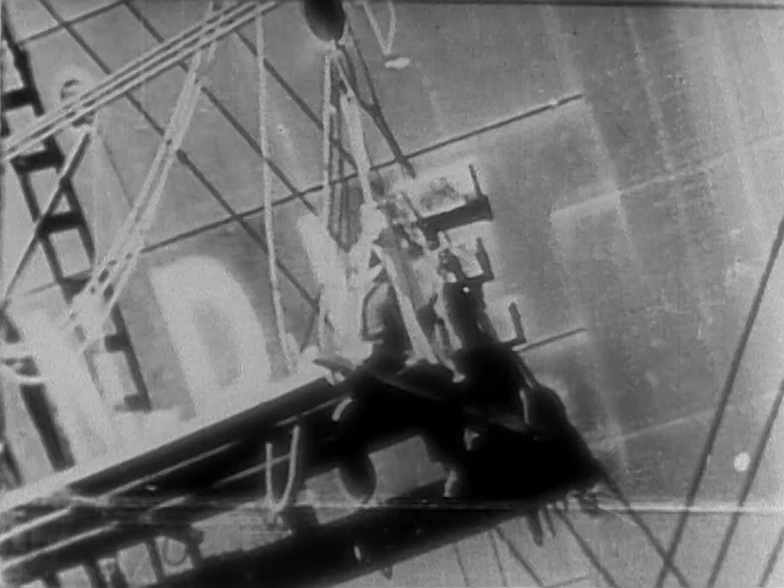On the 9th of February 1942, as the work of conversion neared completion, sparks from a burner's torch ignited bales of life preservers in the Grand Lounge and a fire started. Fanned by a strong northwest wind, the blaze swept over both sides of the promenade deck until by 15:30 it appeared that the entire deck was aflame.

Shortly thereafter, the fire caught hold on the quarters of the boat deck, sun deck, and on the bridge, so that the 3 upper decks and practically all spaces except the theater were enveloped in flames and smoke.

The New York City Fire Department took charge of the firefighting activities. Operations were directed chiefly toward getting the fire under control as soon as possible, keeping it from spreading to the lower decks, and protecting the pier on the leeward side of the vessel.

By 15:30, the Lafayette had taken a list to port. Gradually, this list increased, until by 2:45 on the 10th of February, the vessel completely capsized, coming to rest on the port side at an angle of a little less than 80 degrees.

The capsizing was the result of a combination of circumstances. First, the reduction of the ship's metacentric height, or stability, to a negative value, causing the ship to heel over. This took place soon after the streams of water had collected on the upper decks. Secondly, the ship's effective freeboard was reduced because of open air and cargo ports on E deck. As the vessel listed past 13 degrees, these ports were submerged.

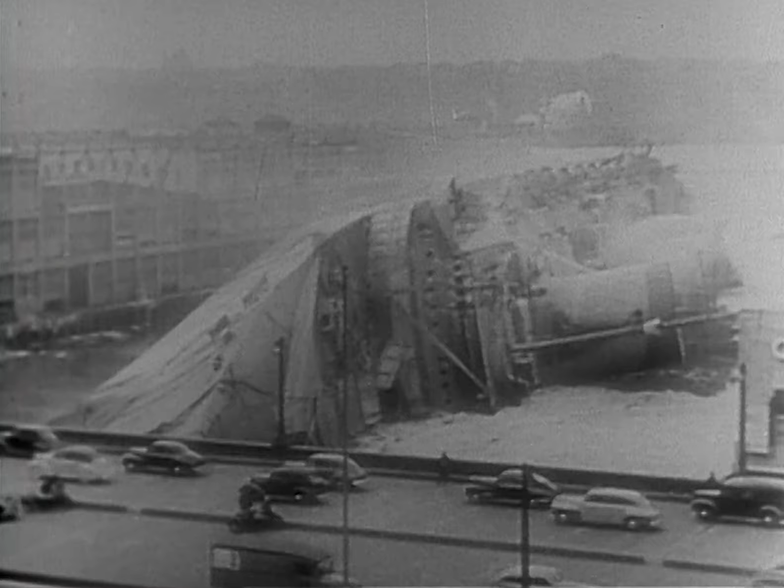The Secretary of the Navy appointed a special committee to make recommendations with respect to salvage or other disposition of the USS Lafayette. The recommendation of the committee was that the vessel should be raised.

The Bureau of Ships placed the vessel under the cognizance of the Supervisor of Salvage, Commodore W.A. Sullivan, who in turn was succeeded by Captain B.E. Manseau. They had at their command the facilities of the Navy Salvage Service, which consists of the salvage section of the Merritt, Chapman and Scott Corporation, operating under the General Ship Salvage Contract, NOBS 36.

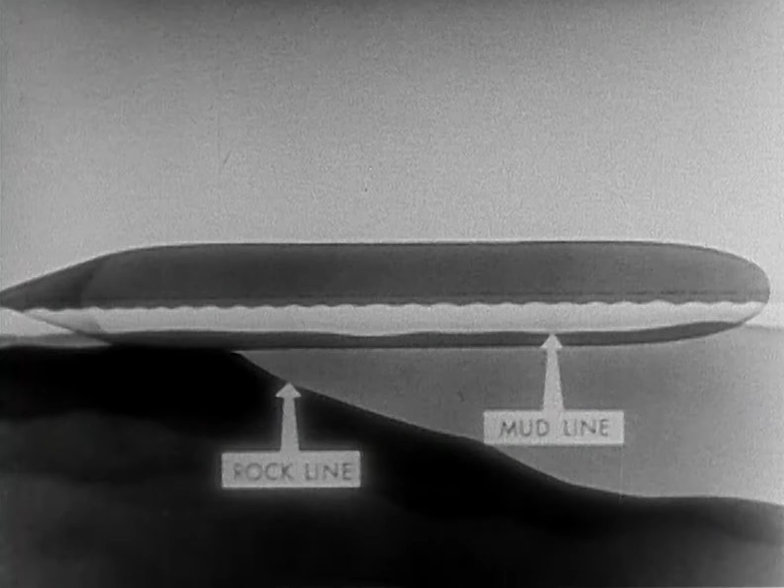At a point about 1/3 the length of the vessel from the bow, the rock profile of Manhattan sloped steeply off into the riverbed. A considerable portion of the vessel's weight rested on this rock shelf. The after 2/3 of the length of the ship was supported and surrounded by mud and soil of various densities. Actually, the possibility of salvage by pumping depended upon the soil in which the after portion of the ship rested, ultimately developing enough bearing to resist the initial tendency to settle by the stern.

It was the decision of the engineers that the ship should be raised by controlled pumping. To supervise the work, engineering offices were erected on a barge alongside the Lafayette, and details were worked out in the main offices of the Merritt, Chapman and Scott Corporation. Upon Mr. A.C.W. Siecke, naval architect and consultant engineer, Merritt, Chapman and Scott Corporation, rested the entire program of stability and strength calculations.

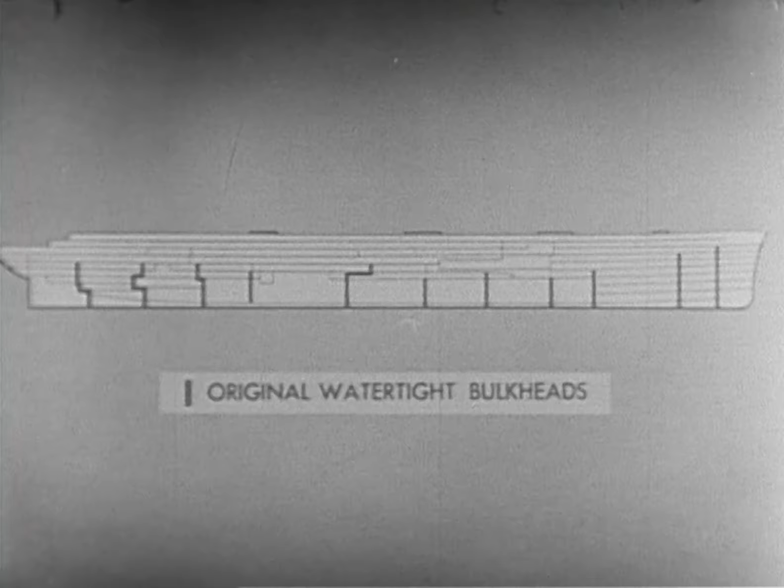The preliminary step in the salvage operation was the removal of the superstructure above the promenade deck. Controlled pumping involved the division of the ship into numerous watertight compartments. The compartmentation of the ship was based upon the original watertight bulkheads. Wooden watertight bulkheads were constructed between decks where no original watertight bulkheads existed.

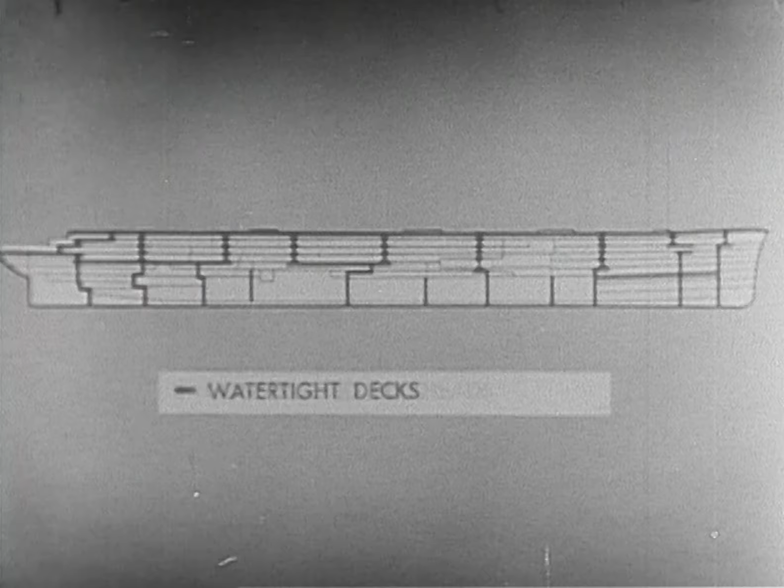To complete the compartmentation, the promenade deck and certain decks below were made watertight. This compartmentation was necessary to control the relationship between the center of gravity and the center of buoyancy during righting operations, and also to control any unforeseen leaks or failures.

At the beginning, there was only a limited number of experienced divers available. Consequently, 2 diving schools were organized at Pier 88, 1 civilian and 1 for Navy divers. As the student divers gained proficiency in handling underwater tools and the diving dress, they were sent out to do underwater work on the Lafayette. Eventually, as many as 73 civilian divers were employed at one time, besides a considerable number of Navy divers.

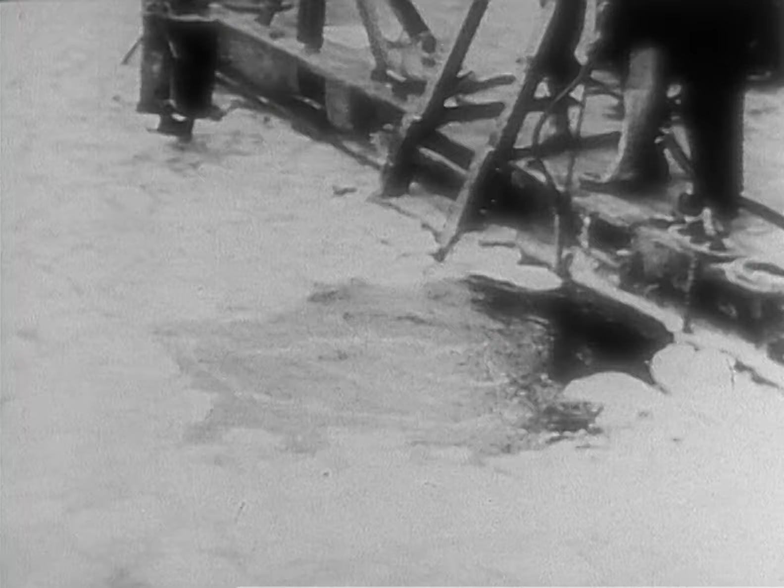Diving conditions were extremely hazardous. Jagged steel edges and broken glass were an ever-present threat. The maze of debris-packed passageways presented a terrific problem. The men worked in complete darkness, the water in the slip containing such an amount of mud and sewage that underwater lights were useless. Work was accomplished by sense of touch alone.

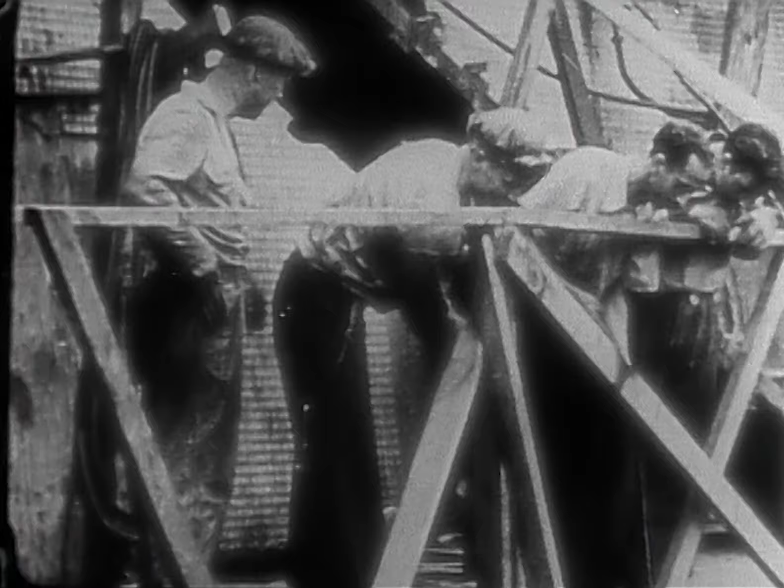Approximately 5,000 tons of superstructure was removed, slightly less than half of which was submerged and was cut away by divers using the underwater gas torch. These decks were removed to lower the center of gravity and to make accessible the various uptake openings for patching.

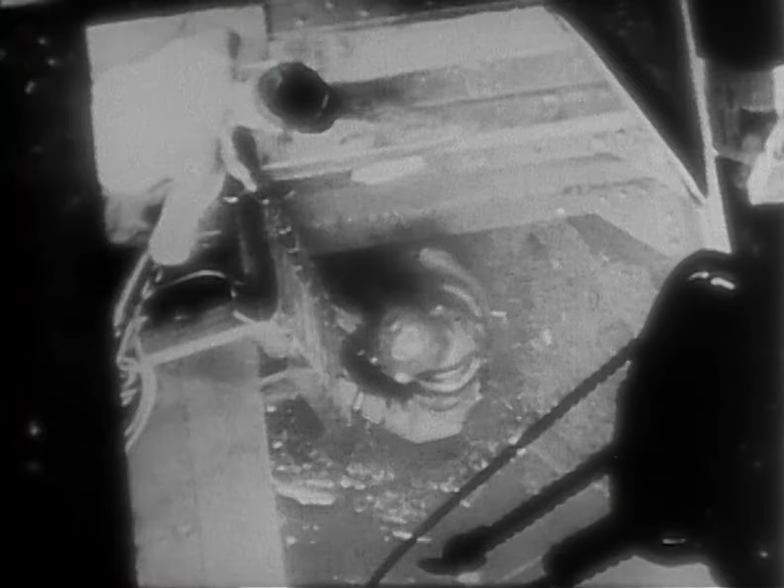When the Lafayette capsized, furniture, stores, and other loose objects accumulated on the port side, blocking passageways, making it necessary for divers to clear away this debris before commencing the actual salvage construction. All minor cabin bulkheading and ship's piping was removed to lighten the ship as much as possible and to make room for the watertight bulkheads. These operations often were carried on in 50 feet of water and 10 feet of mud, since much of this debris had settled to the lowest possible point, the submerged port side of the ship.

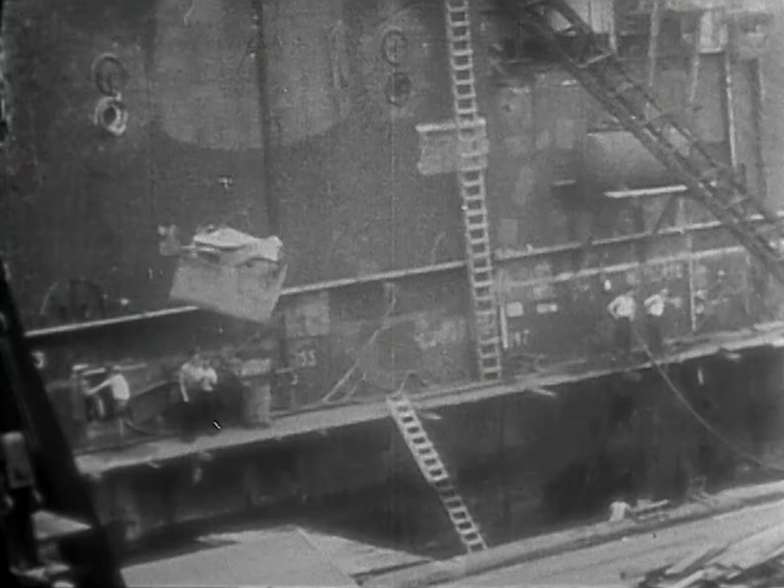After capsizing, cargo passages became vertical shafts, and through these shafts, scrap material was hoisted from the interior of the ship and deposited on barges lying alongside. Records were kept of the weight removed for future calculation.

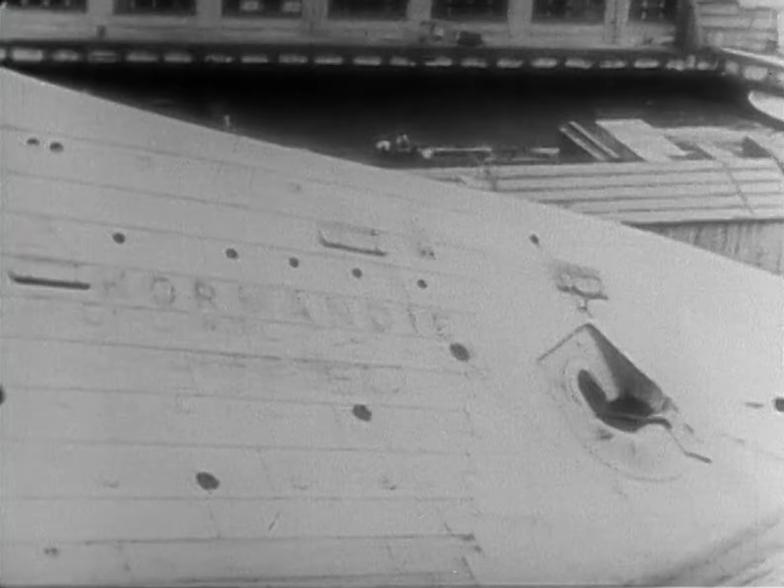A miniature industrial city sprang up on the starboard side of the Lafayette. Air compressors for the diving units, portable power generators, tool sheds, banks of cylinders containing cutting gas, firefighting equipment, winches, small derricks, catwalks, welding machines. Power and water lines ran the length of the hull.

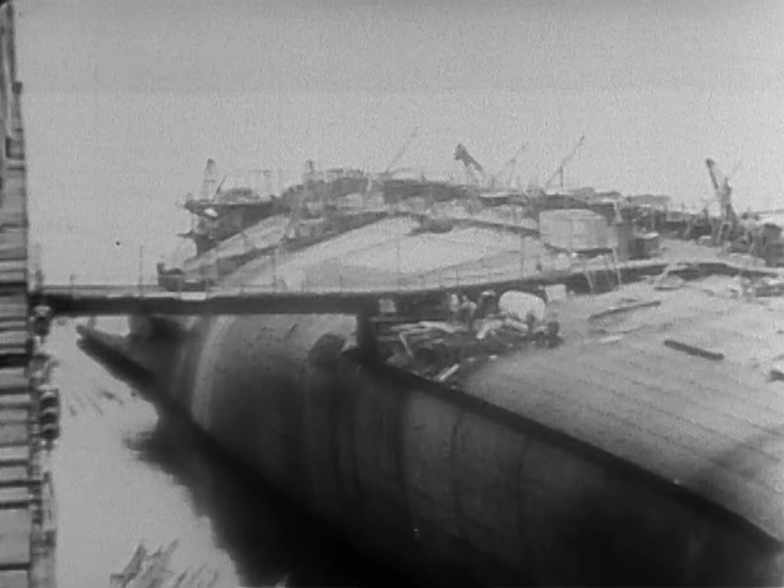Barges were moored along the almost vertical face of the promenade deck. These contained the blacksmith shop, the carpenter shop, machine shop, and engineering office, while other barges used as lighters passed to and from the ship carrying material and scrap. During salvage operations, the Lafayette presented a strange appearance to those aboard ships passing up and down the busy Hudson River, much like a giant Gulliver overrun with busy Lilliputians.

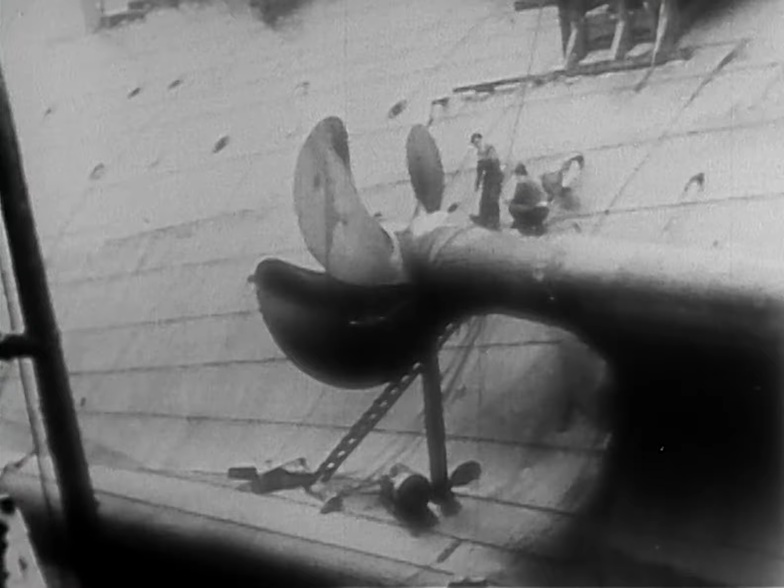To prevent any possible damage to the starboard screws, they were removed prior to righting operations. Each of the screws weighed 23 tons. The port screws, being submerged in 50 feet of mud and water, could not be removed.

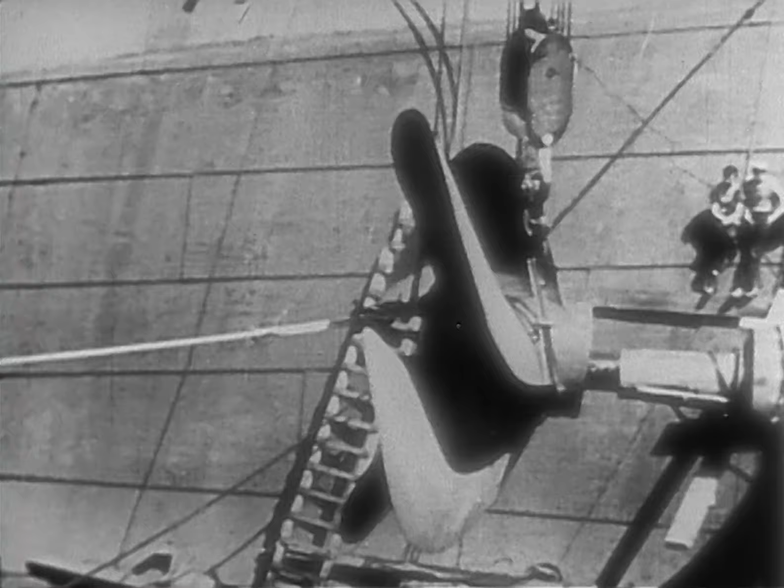The interior of the ship as she lay on her side presented another strange spectacle. Bulkheads became decks, decks became bulkheads. Elevator shafts were used as companionways, and the former thwartships passageways were used as elevator shafts. Stairways and ship's ladders were useless, and carpenters were kept busy during the entire salvage operation building wooden ladders, platforms, and scaffolding to facilitate movement of men and materials throughout the interior of the ship. Miles of ladders and thousands of feet of lumber were used in this construction.

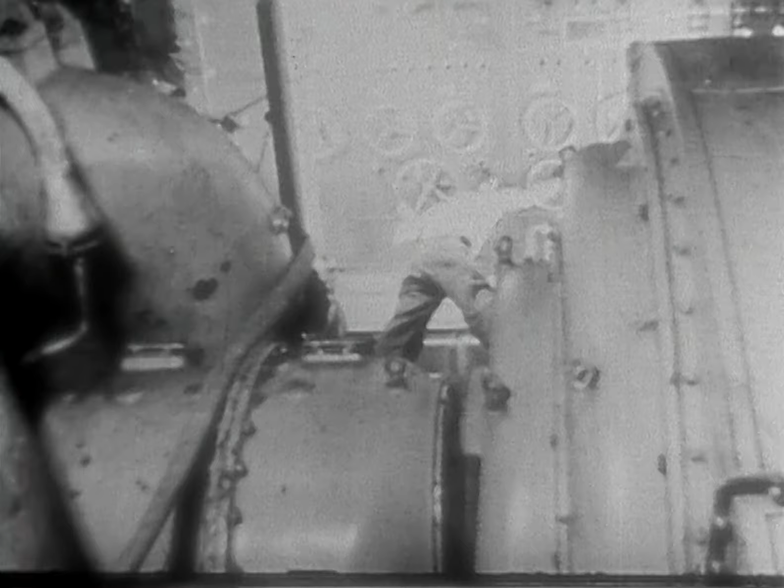Immersion destroyed the ship's electric system. 3 of the 4 turbines were inundated, but after the ship was raised, the blading of the turbines was found to be only slightly corroded.

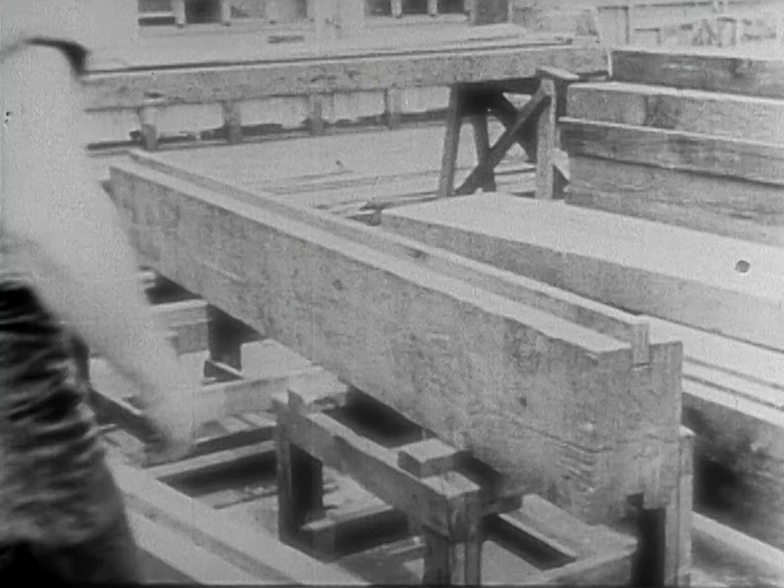To compartment the ship, it was necessary to install large wooden bulkheads. The bulkheads were constructed of grooved 8 by 12 timbers with a 2 by 4 joint. Approximately 210,000 board feet of 8 by 12 timbers and form lumber was used in constructing these bulkheads. If all bulkheads were placed together, they would make a bulkhead 350 feet long and 60 feet deep. The placement of bulkheads in the Lafayette followed this plan.

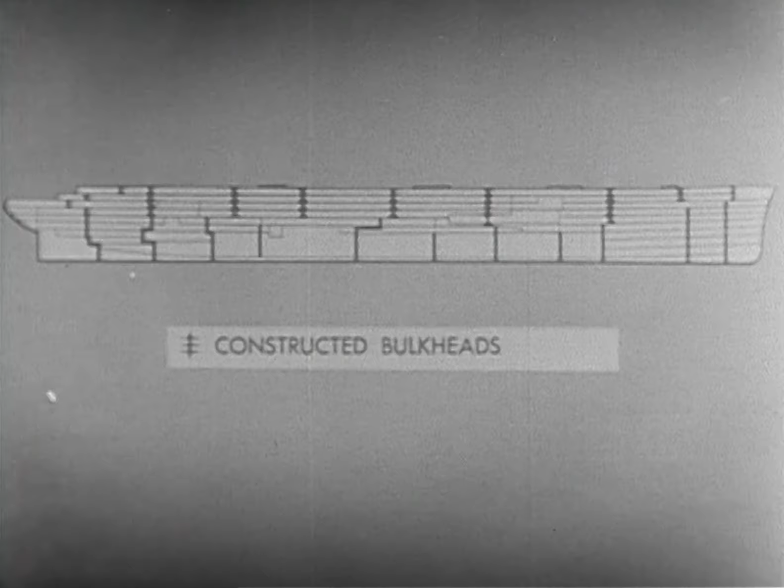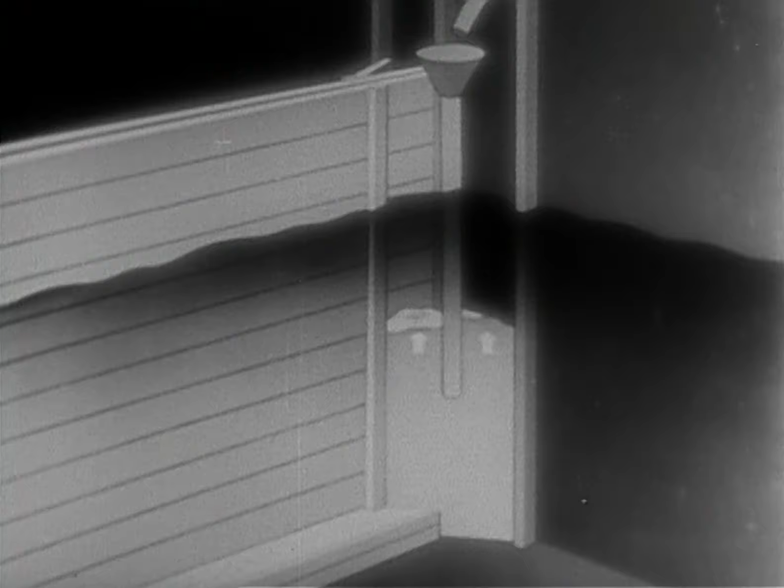For water tightness, concrete was poured where the wooden bulkheads met the ship's steel decks and where they met the skin of the ship. The concrete was poured underwater using the Tremie process. The concrete was pumped into forms by a Pumpcrete machine, sealing the wooden bulkheads to the steel structure of the ship. These bulkheads were built from above water downward, and 900 cubic yards of a 1-2-3 mix of concrete was used for the sealing.

To back up cargo ports and airport patches on the port side of the vessel, divers poured bags of concrete over these spots to strengthen them. 16 cargo ports and 356 airports were strengthened in this manner.

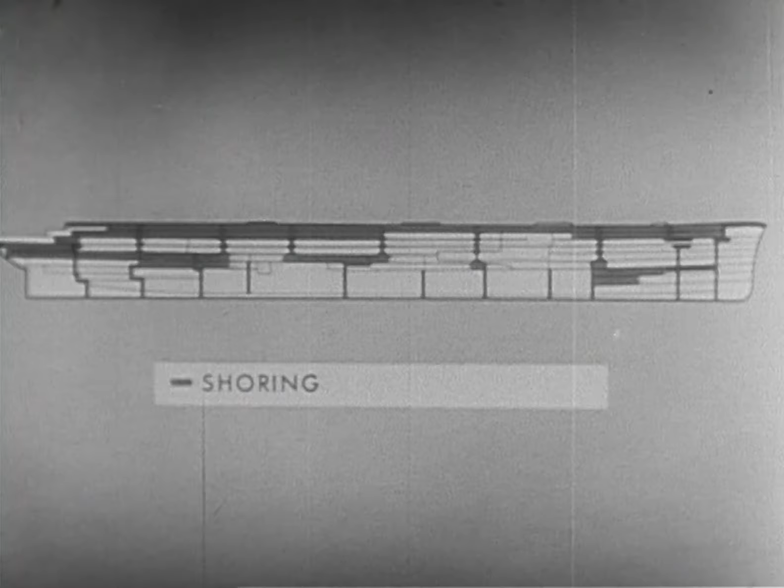The amount of shoring which had to be done is indicated here. In all salvage jobs requiring extensive pumping, the ability of decks and bulkheads to withstand the hydrostatic heads expected requires thorough consideration. Timber beams were placed between the original deck beams to support the deck plating against water pressure. The shoring extended from these timber beams to timber stringers on the deck below.

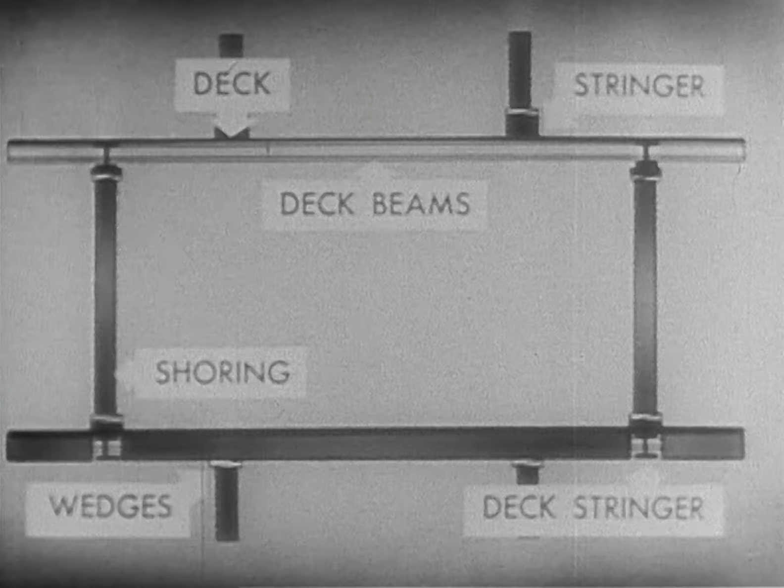This is the shoring at C deck after the ship was raised to 30 degrees. A total of 90,000 board feet, or approximately 1.5 miles of shoring timbers, were used, and all the immense amount of material was placed and aligned by divers. Here are indicated the underwater openings on the promenade deck, which necessitated the construction of special patches.

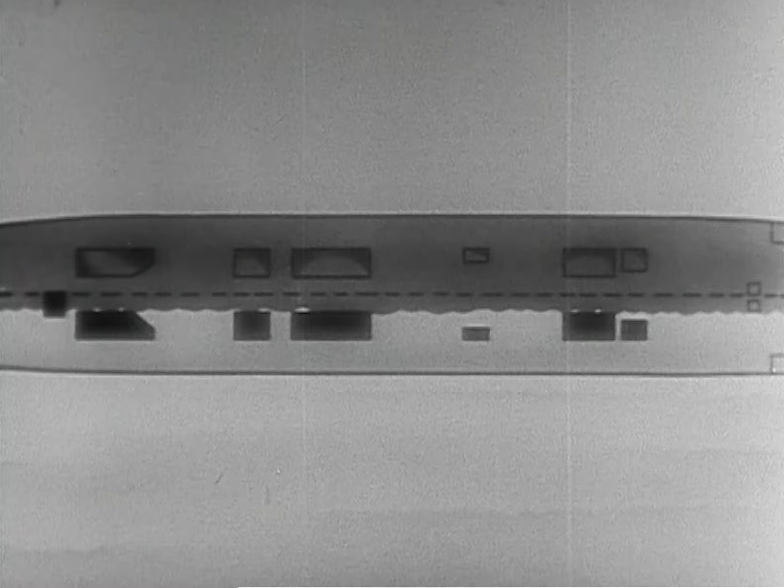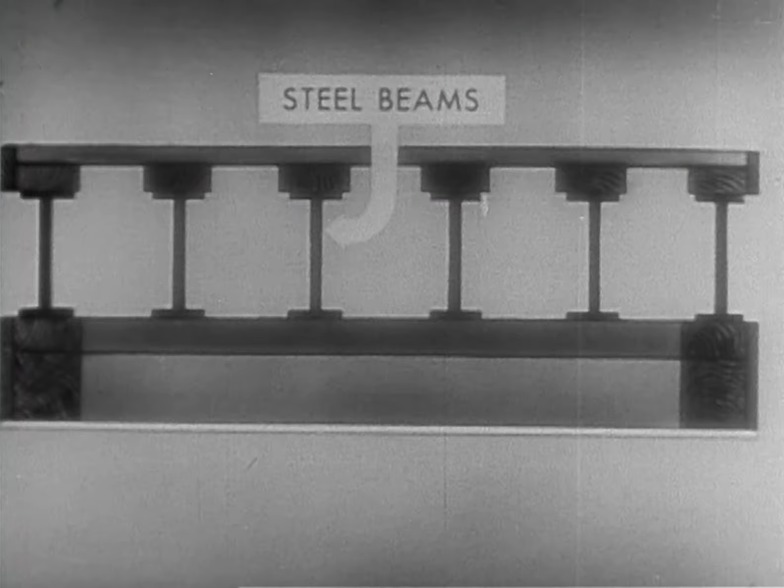The main patches were constructed in this manner. It is interesting to note that 21-inch steel I-beams were used. Also, that rubber gaskets used in patches were made from rubber recovered from the Lafayette's decking.

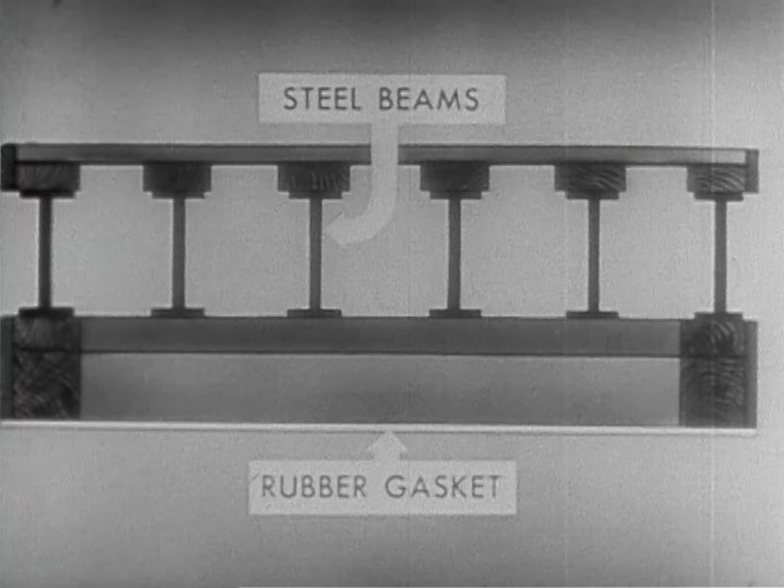The patches for the various openings were constructed on the barges moored alongside, and when completed, were placed in position through a combined operation of men on the surface, divers, and derricks. Here, a turbine uptake patch weighing 21 tons is being lowered into the water preliminary to transferring it to a vertical position for placement against the ship.

All large patches were equipped with gate valves through which water was permitted to flow to keep the water levels inside and outside equalized until ready to commence pumping. The valves also permitted flooding during pumping operations should that become necessary.

When the patches were properly seated, the rods or bolts which had been previously secured at the inboard end to a suitable ship structure by means of hinge shackles or levers, were run through corresponding bolt holes in the patches and bolted up by divers from the outside.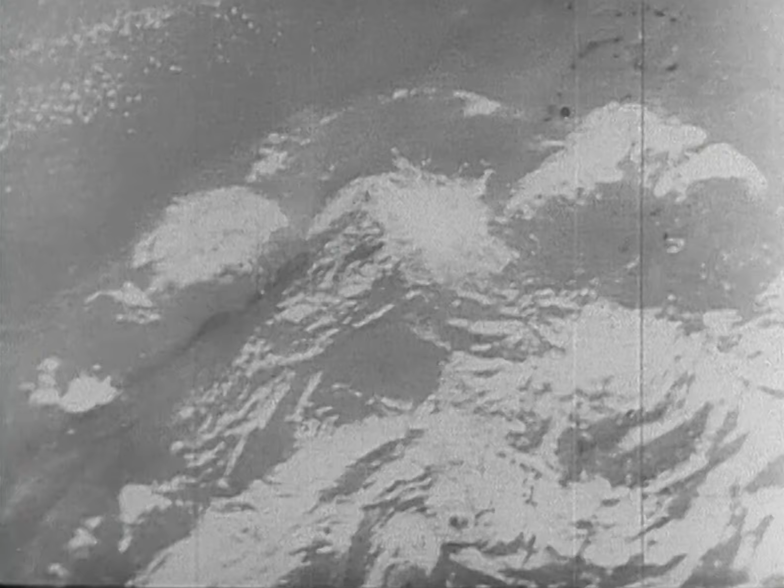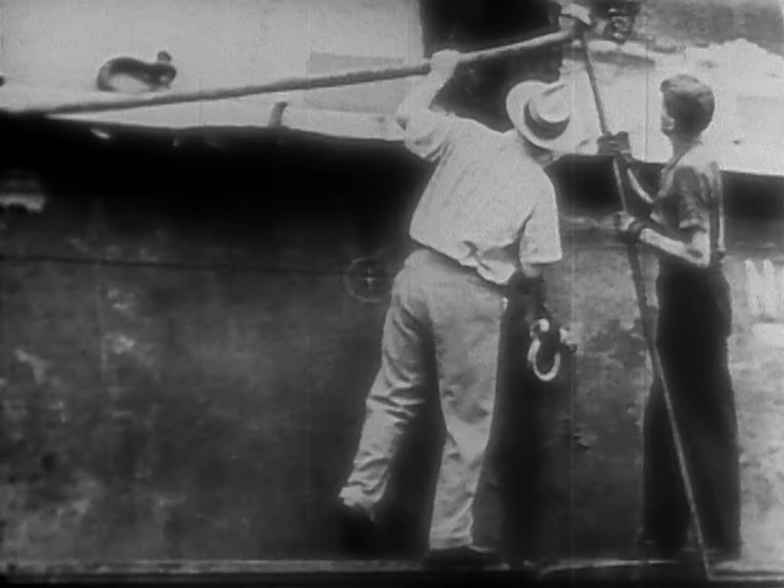Captain J.I. Tooker, one of Merritt, Chapman, and Scott's leading salvage officers, was made superintendent of the work on the Lafayette. Captain Tooker was well suited for the Lafayette job in view of his previous experience in salvaging capsized vessels, and particularly in view of his many years' experience in diving.

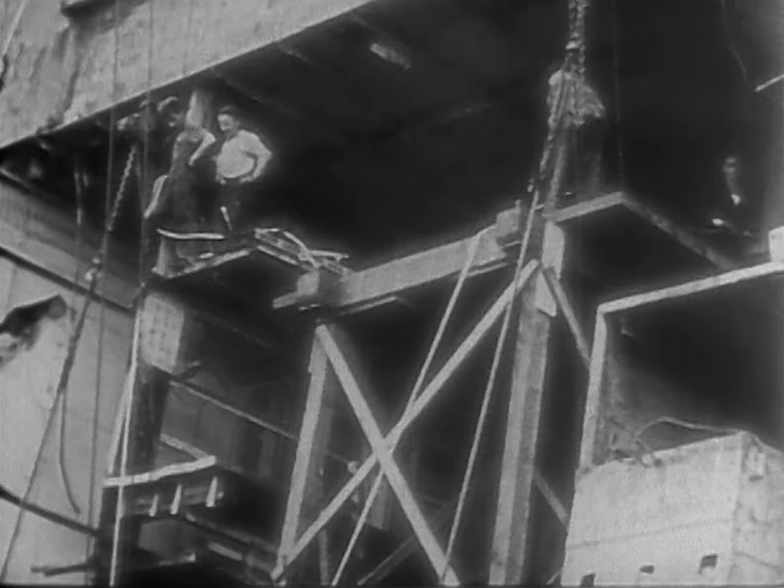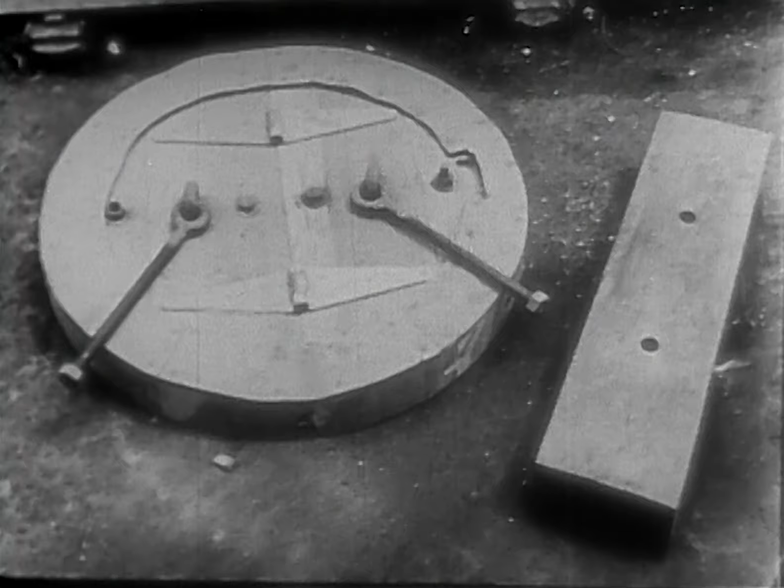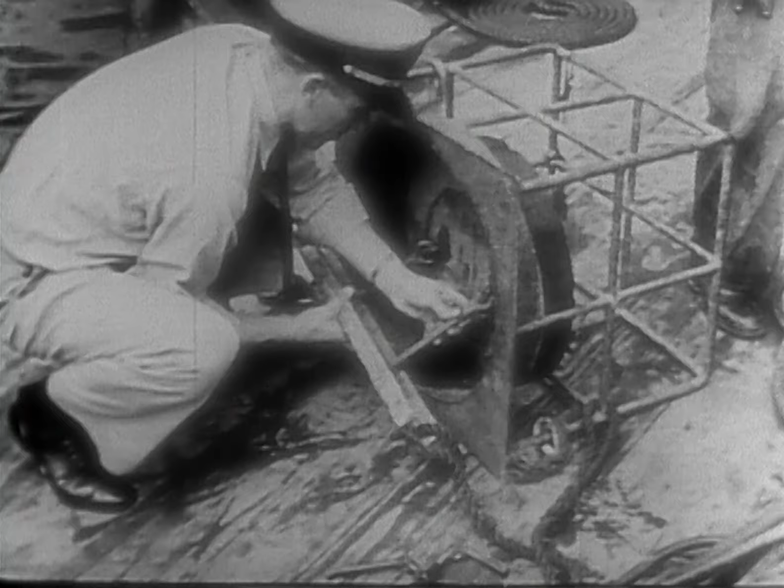Porthole patches were hinged discs of wood with strong backs. The patches were hinged to enable the diver to place the patch through the porthole from the inside of the ship. It was often necessary to excavate 10 feet of mud to place these patches, and sometimes it required a week's work for the placement of one patch. 356 patches were placed in this manner, one diver working the entire period of salvage operation on this job alone.

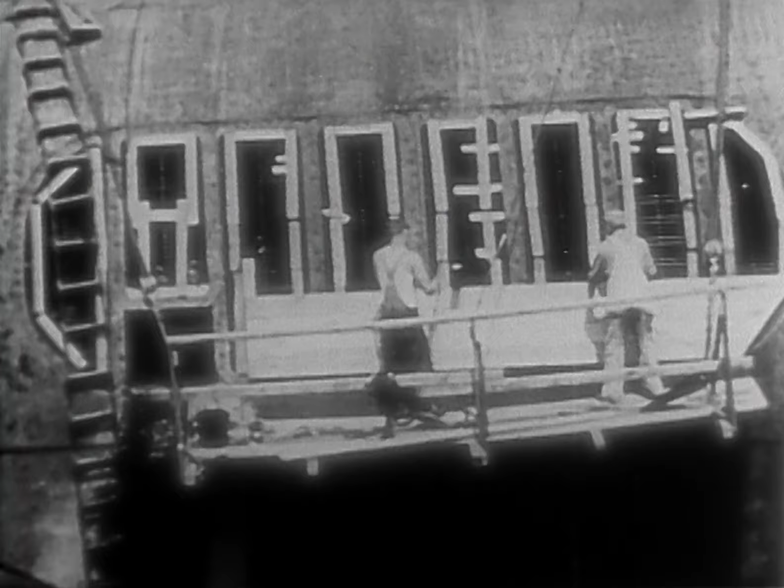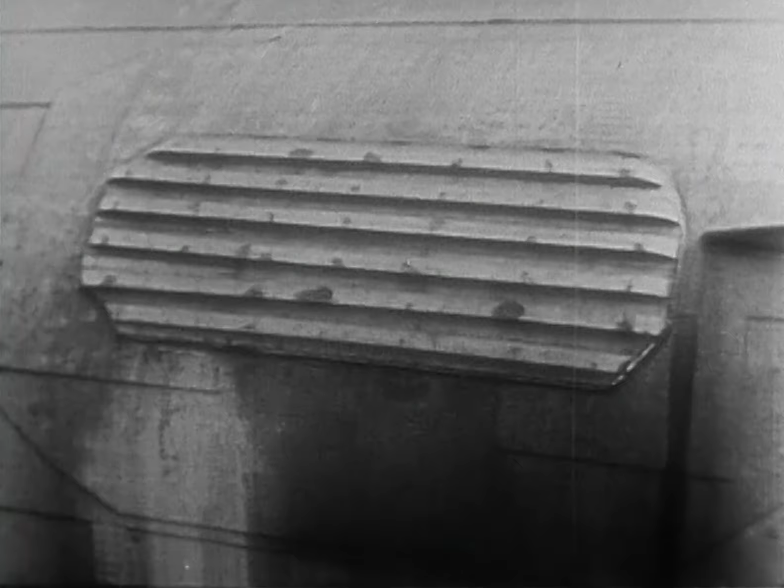As a safety precaution, the starboard condenser intake was covered with a wooden patch to ensure water tightness when the ship was righted. Wooden plugs were used to seal 4,500 small openings. All patches, plugs, shoring, and bulkhead timbers were prefabricated in the carpenter and blacksmith shops located aboard the barges moored alongside the face of the promenade deck.

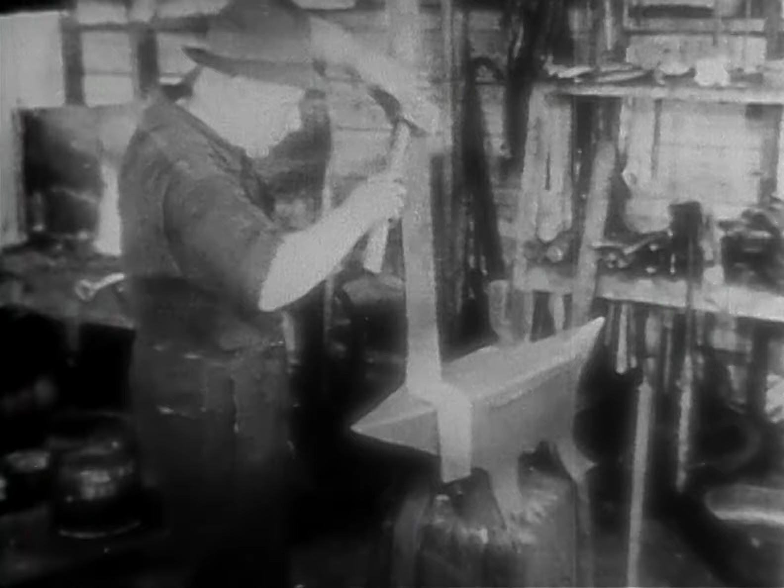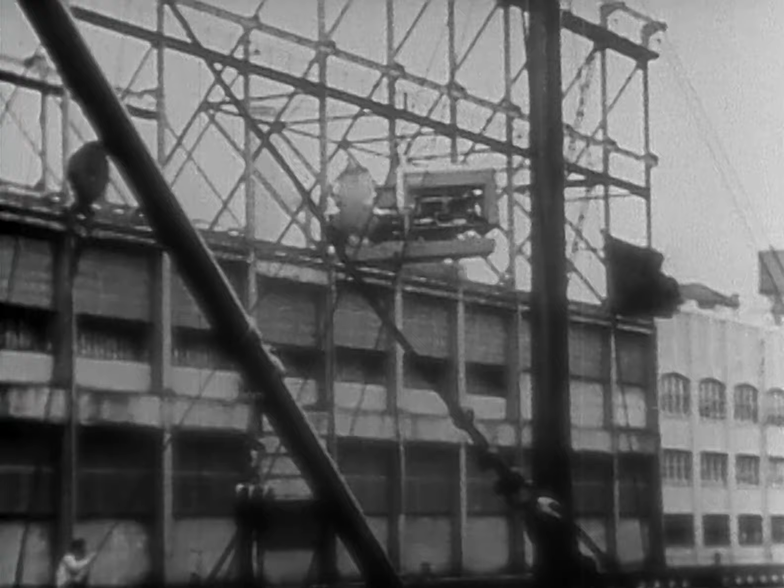Pumping of the Lafayette was accomplished by the use of 40 10-inch pumps, 32 6-inch pumps, and 25 3-inch pumps, capable of discharging 40,000 tons of water an hour. They were tested on the pier previous to installation. The placing of the pumps inside the vessel, just prior to the righting operations, was a hazardous and difficult job, involving in many cases considerable ingenuity on the part of the riggers.

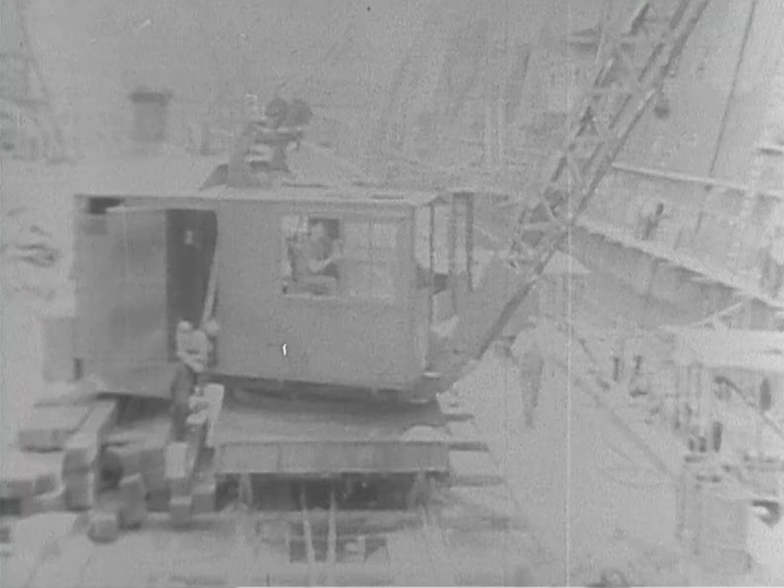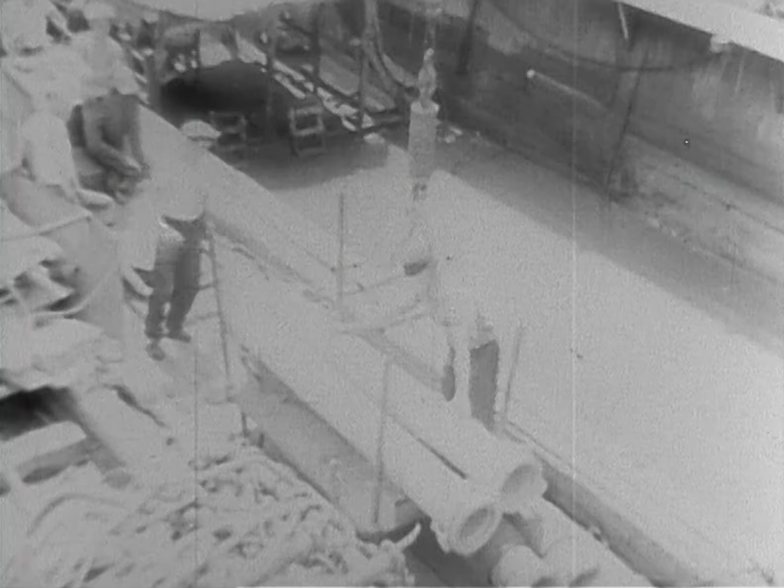It was necessary to locate a suitable number of 10-inch and 6-inch pumps in each of the watertight subdivisions of the ship to adequately de-water the compartments in a short time, and at the same time to provide a reserve to handle unexpected leakage. It was also necessary to have enough initial reserve capacity available to compensate for the expected reduction due to increasing head as the water level dropped and the vessel rotated. In each case, suctions extended to the port side of the ship and, where possible, close to the watertight boundary of each compartment. Discharges ran nearly horizontal through the promenade deck.

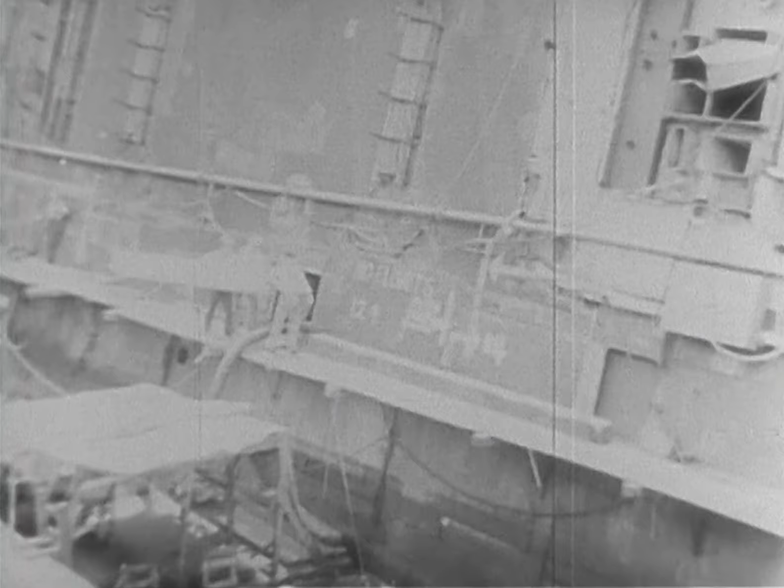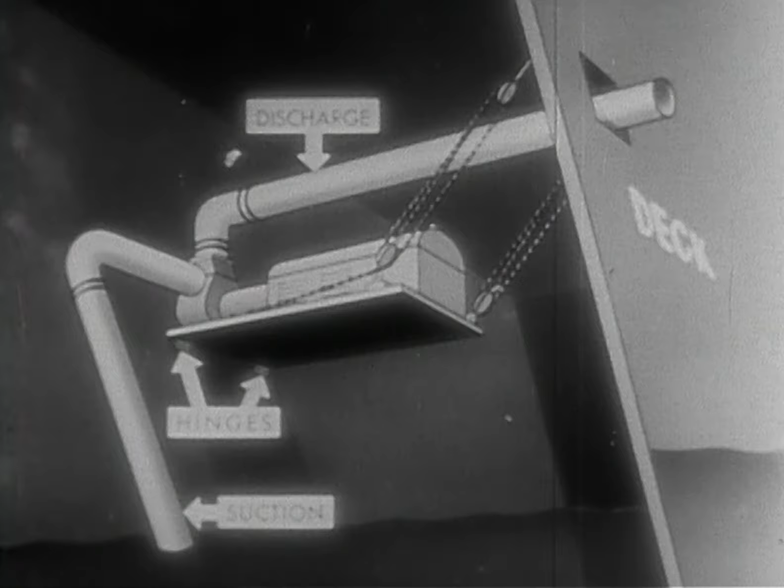The pump platforms were hinged to the vertical decks and rigged in such a manner that as the ship rotated, the pumps could be kept in a horizontal position by slacking off on chain falls. In order that gasoline-driven pumps would not exhaust in the compartments, flexible steel exhaust lines were carried up to the starboard side of the ship and out through air ports.

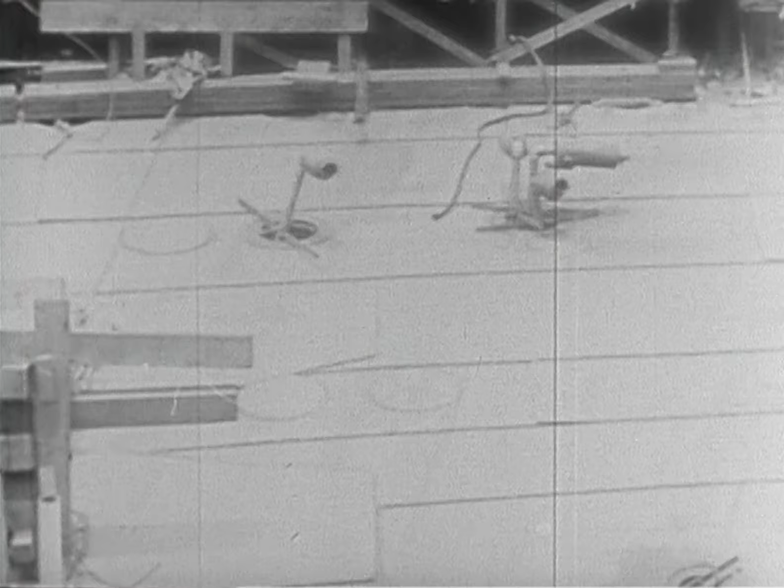When the Lafayette capsized, her rudder cut under the pier about 5 feet, shearing 5 piles supporting Pier 88. Since that portion of the ship still projected under the pier, it was necessary to remove a portion of the pier at this point to avoid any possible damage to the stern of the ship during righting. As a further precautionary measure, pile clusters were driven to act as fenders for the vessel to bear against as it approached a 45-degree position.

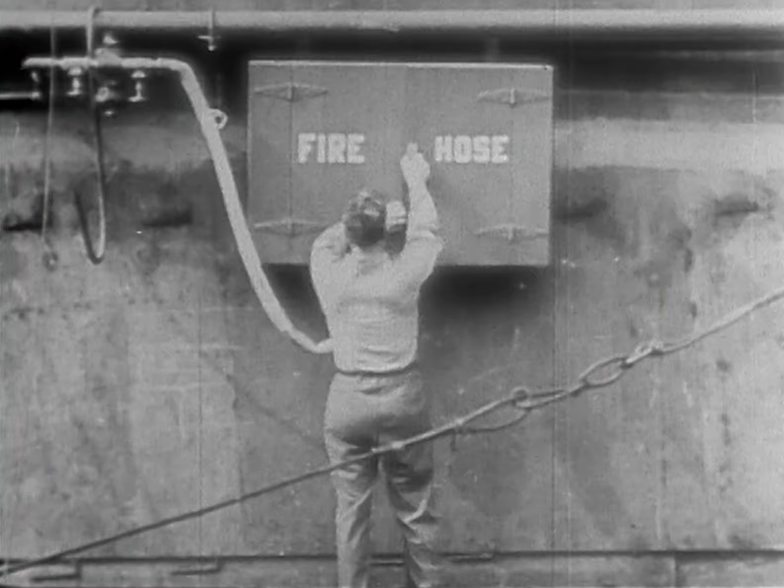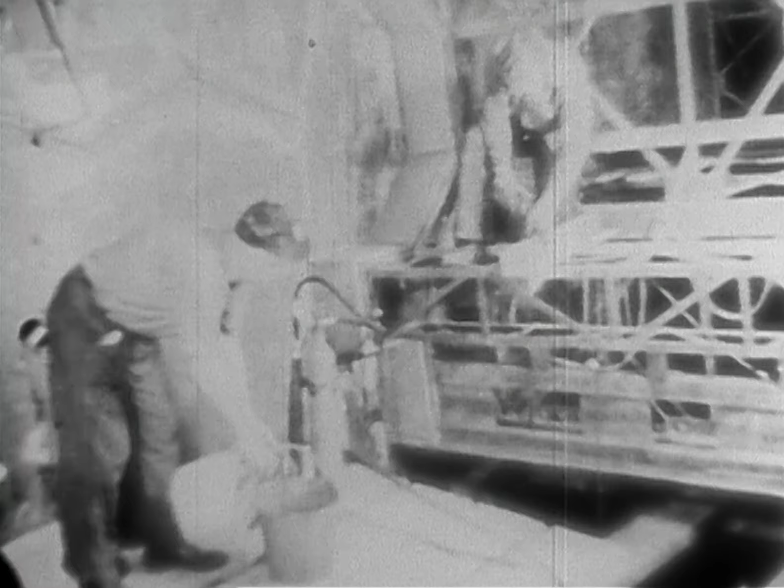From the very beginning of the salvage operations, it was necessary to take extraordinary fire precautions. After the initial fire and capsizing of the vessel, the embarrassment that might be caused by subsequent fires during salvage operations made it necessary to take exaggerated precautions, even though the probability of further damage to the ship because of fire was very small. Smoking was not allowed inside the hull while the ship was being cleaned or cleared, or during the final pumping operations when the possibility existed of gasoline fumes permeating the ship. A fire watch was always posted whenever there was burning with an oxyacetylene torch.

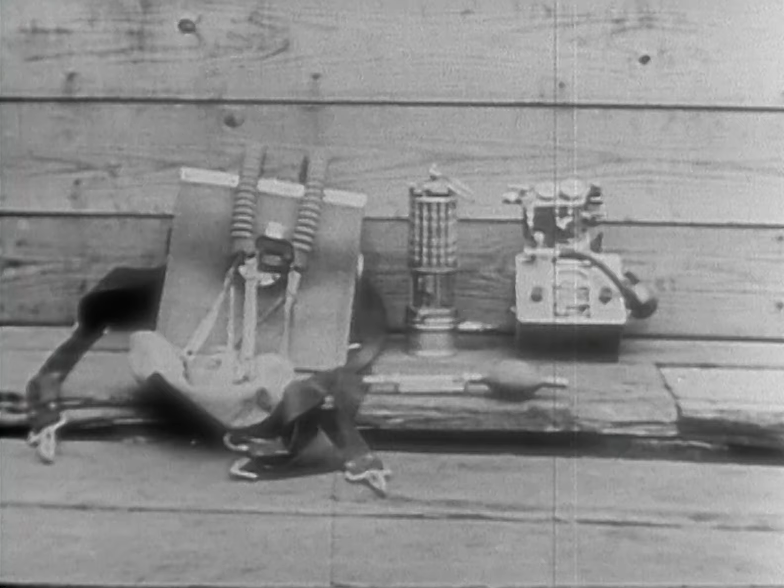Various gas testing devices and implements were used throughout the salvage of the vessel as a constant precaution against the formation of gas from organic materials within the ship and that created by the immense amount of city sewage draining into the slip in which the ship lay.

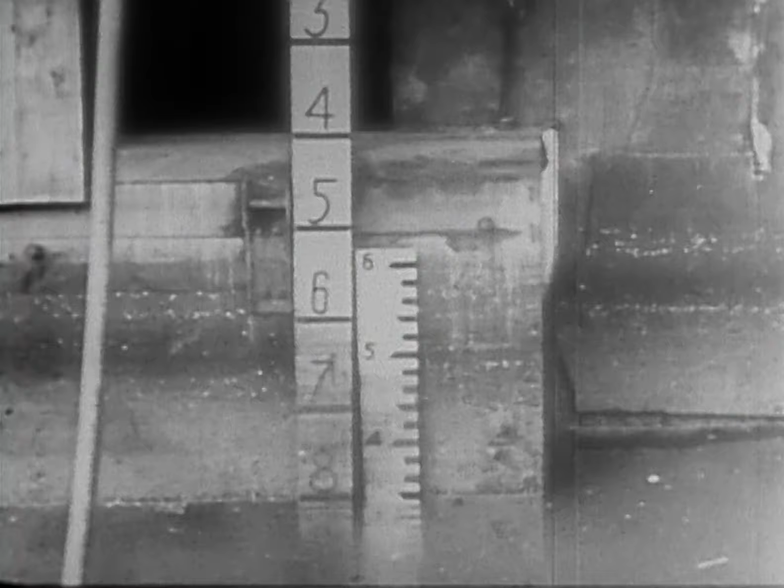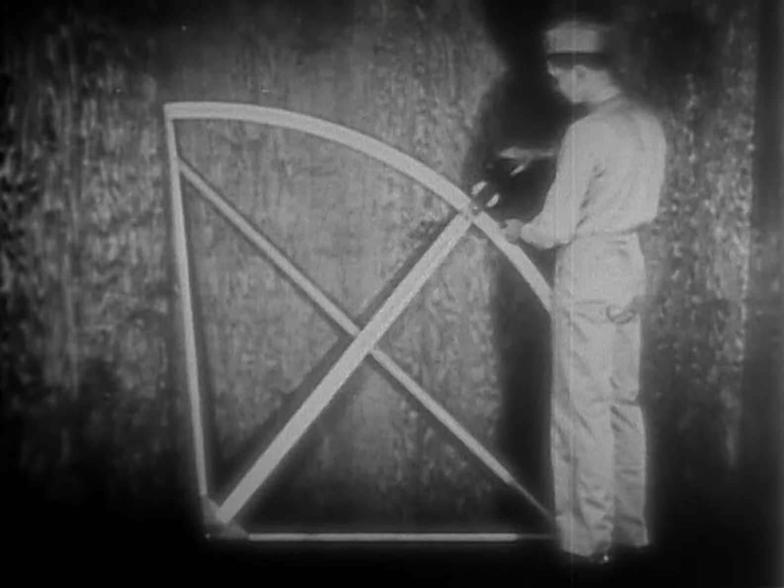4 instruments were constructed to give an accurate picture of the exact position of the ship at any time during righting operations. Draft and tide gauges were installed at various points throughout the ship. A clinometer was constructed to record the angle of list of the ship.

A movement gauge was installed to indicate the movement of the ship toward Pier 88. The compartment testing was completed by the 2nd of August, and after thorough preparation, an overall pump test was made for a 48-hour period, during which time divers applied sawdust to all patches and seams where minor leakage might exist, with the result that the ship was nearly bottle tight.

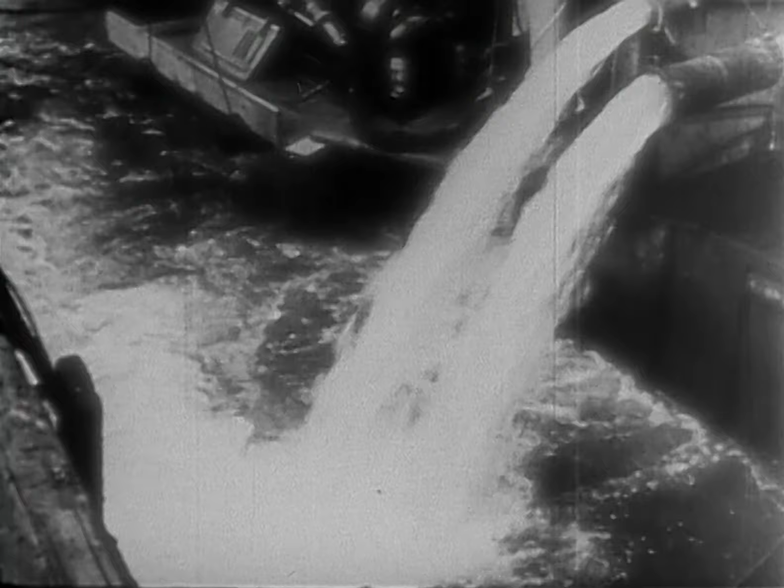Pumping operations were under the direct supervision of Captain B.E. Manseau, USN, supervisor of salvage, and Captain Tooker. Because there was no particular reason for speed, and because it was extremely important to build up no forces or develop leakage which could not be controlled, pumping continued cautiously, and each rising tide was utilized to supply the additional buoyancy necessary to move the ship.

Air and water jets installed in various patches on the port side and along the port edge of the promenade deck were started and maintained continuously in order to relieve any mud suction that might exist. At 0800 on the 6th of August, there was a 16-foot negative head. With the rise in tide, the buoyancy increased, and at about 1/2 tide, the vessel started to roll slowly and steadily.

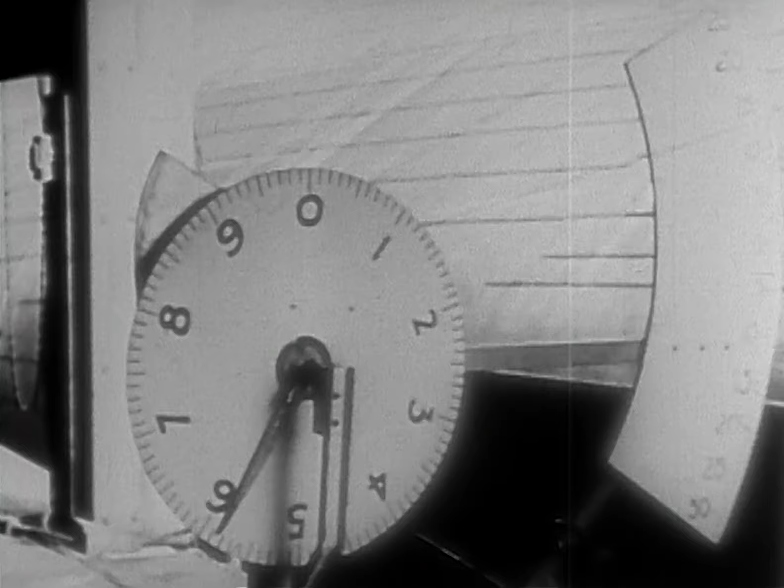During the pumping operations, readings were taken every 15 minutes on the movement gauge, draft gauge, and clinometer. These readings were all transferred to the control office on the ship for the recording and plotting of the movement of the ship.

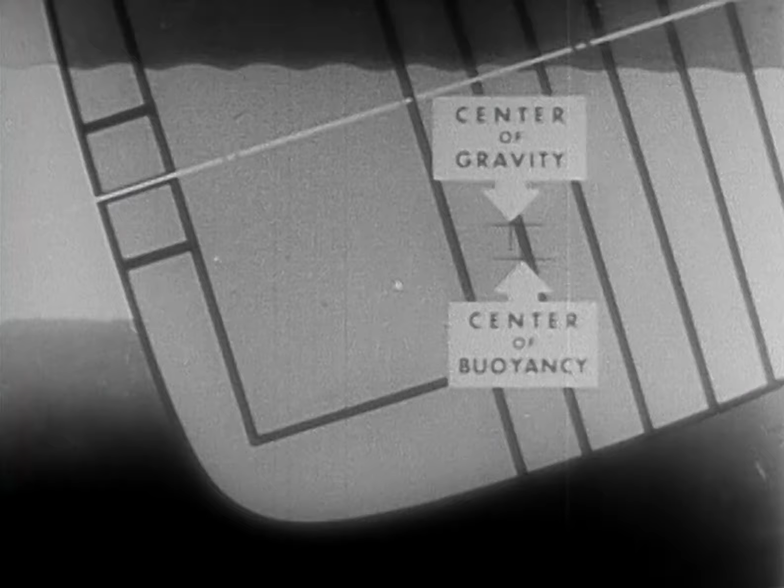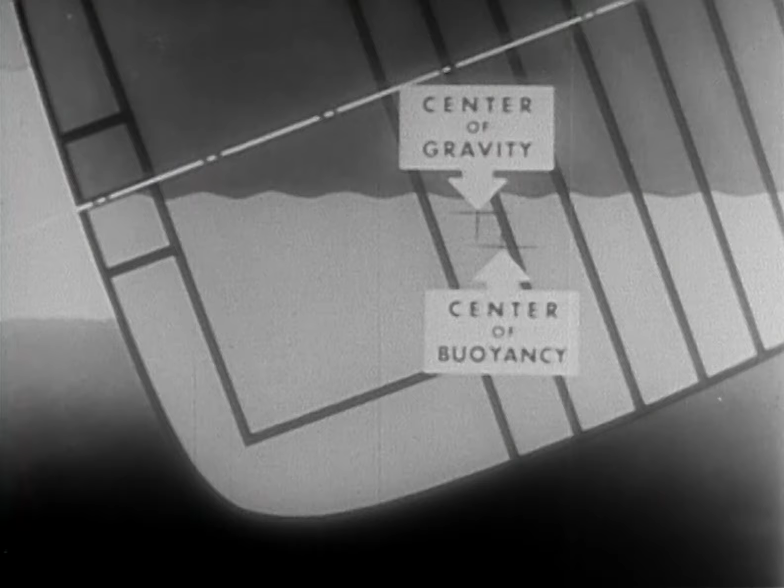In its initial capsized position, with all decks above the promenade deck removed, the center of buoyancy was about 2 feet farther from the keel than the center of gravity. This gave the Lafayette the initial tendency to right itself. As water was pumped from the ship, the buoyancy increased with a corresponding decrease in the weight of water in the ship. Also, the distance between the center of gravity and the center of buoyancy increased. The result was an increased tendency of the ship to right itself, pivoting about the turn of the bilge.

It became apparent that each time the water in the ship was lowered relative to the outside water level, the ship started to rotate, and the instant pumping stopped, the ship's movement stopped. It was felt that absolute control could be maintained over the vessel's every movement. During the righting operations, Rear Admirals E.L. Cochrane and J.J. Broshek inspected the ship.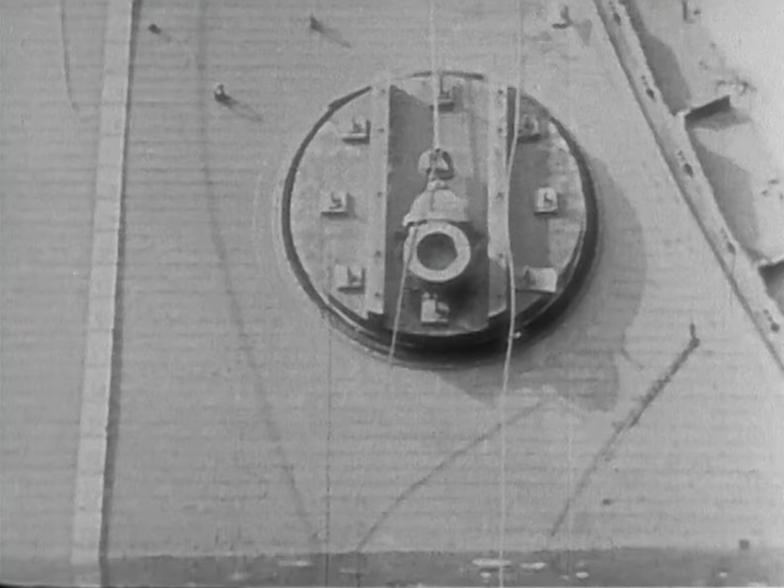As the promenade deck rose above water, the patches became visible. The patches on the underwater or port side of the promenade deck covered openings similar to those on the high or starboard side. Measurements for the underwater patches were obtained by checking the openings on the high side and further checking by divers the underwater openings. Total weight of all these patches was 350 tons, the largest single patch weighing 52 tons. It was 54 feet long, 22 feet wide, and 3 feet deep.

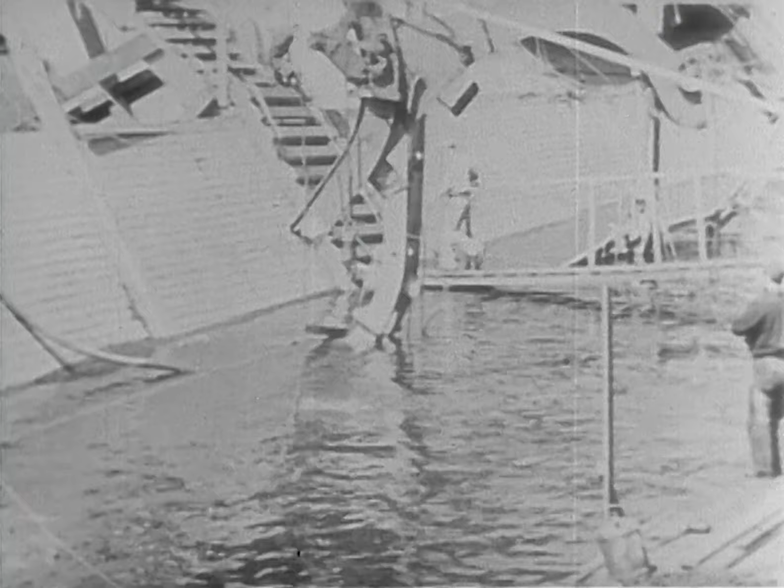During the process of removing all decks above the promenade deck to lower the center of gravity and to facilitate patching, it was found impossible to remove all of the boat deck, the last 10 feet of this deck being so deeply buried in the mud that the divers couldn't reach it. Consequently, when the righting operations had progressed until this remaining portion of the boat deck appeared above water, this section was removed using torches to further lighten the weight on the port side of the ship. Approximately 500 tons were removed.

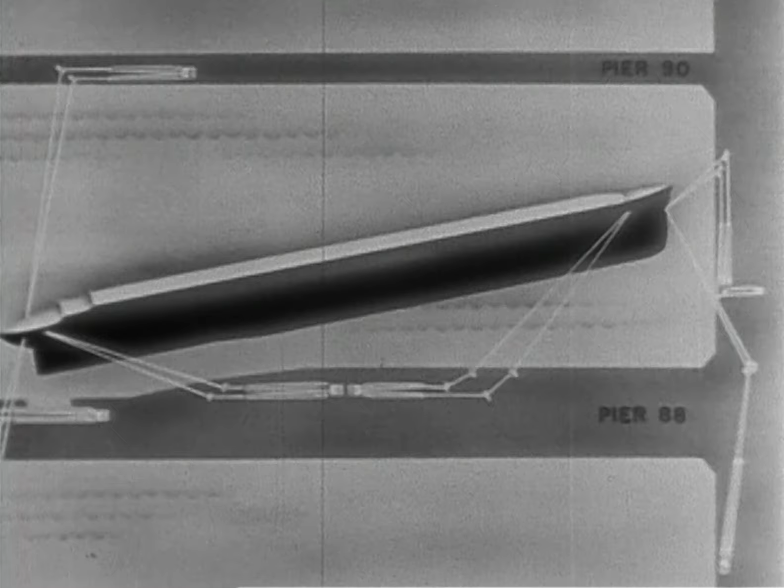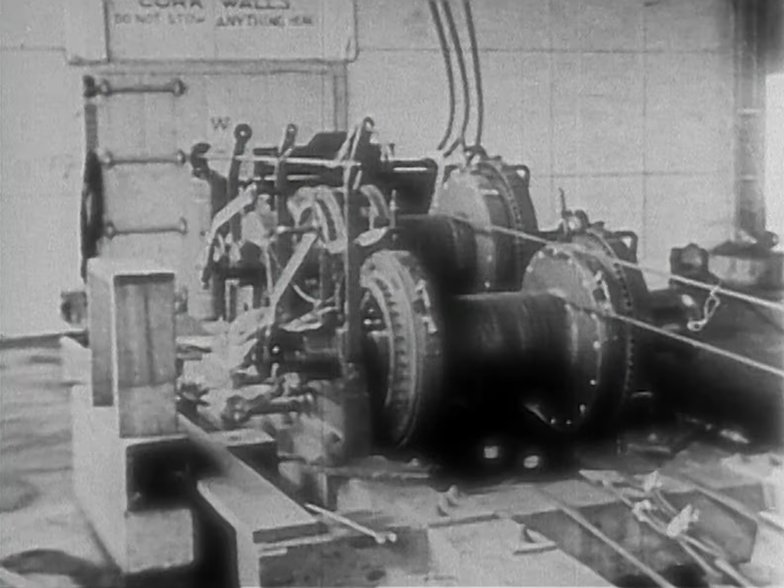In order to secure the fore and aft movement of the vessel in the slip, special mooring arrangements were designed and installed. 40 horsepower, 2-drum winches supplied the hauling power for each set of mooring lines. The hauling part of the standard 9-part beach gear tackle was led to the drum of the winches.

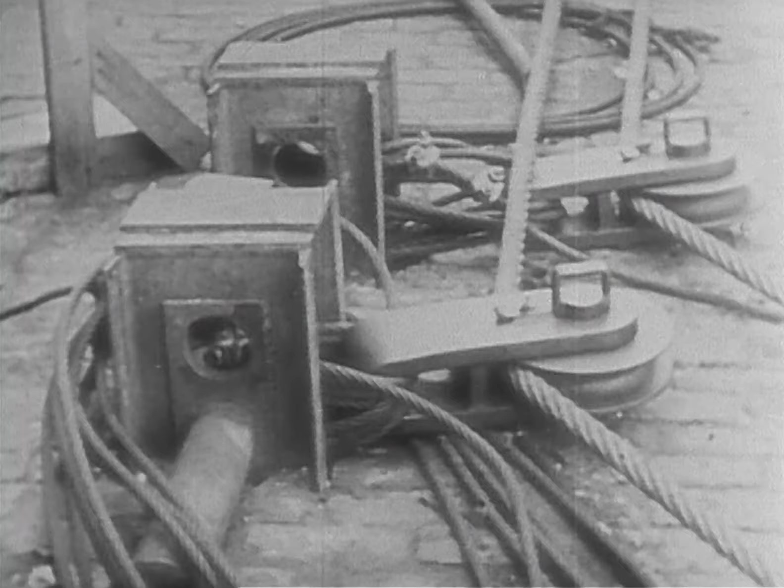As the stern came afloat during the early stages of pumping, a steady pull was maintained on the cables leading to Pier 90, so that by the time the vessel approached its 45-degree position, the stern was well clear of the safety fender pile clusters along the north side of Pier 88.

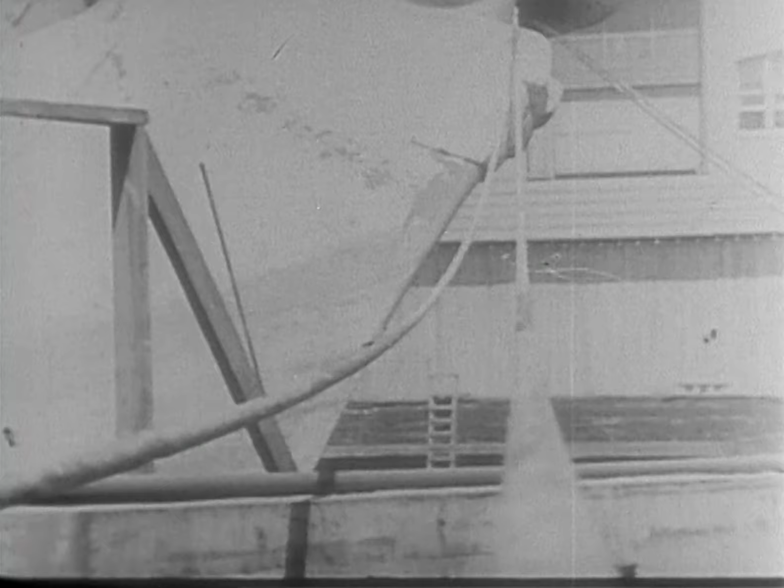Early on the morning of the 9th of August, as the Lafayette reached an inclination of 49 degrees, the pumps in compartment 16 were unable to lower the water beyond the existing level. A leak of extremely serious nature had developed in the way of the rock ledge. The damage occurred just under the turn of the bilge on the port side between frames 224 and 244.

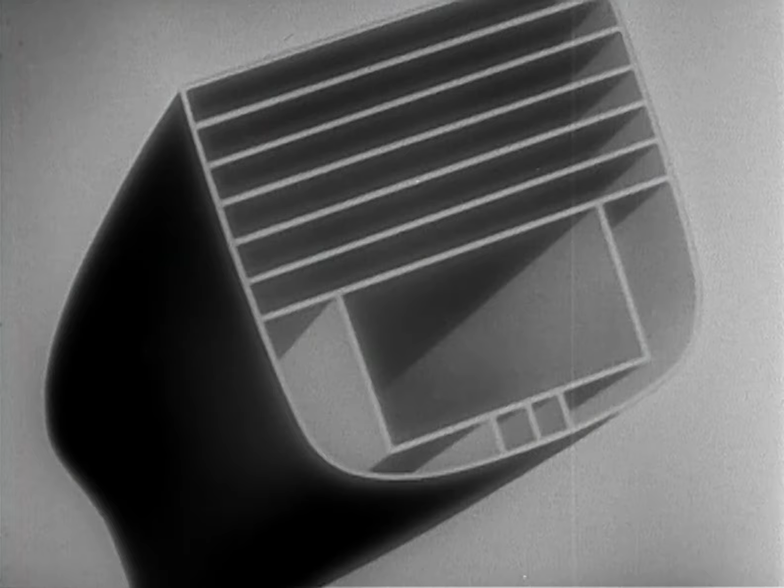Due to the movement of the ship on the bearing rock, the hull plates had been cracked, the cracks extending 54 feet long and 27.5 feet wide. After the approximate position of the leak was known, divers attempted to stop the leak by using bags of rags. This attempt was unsuccessful.

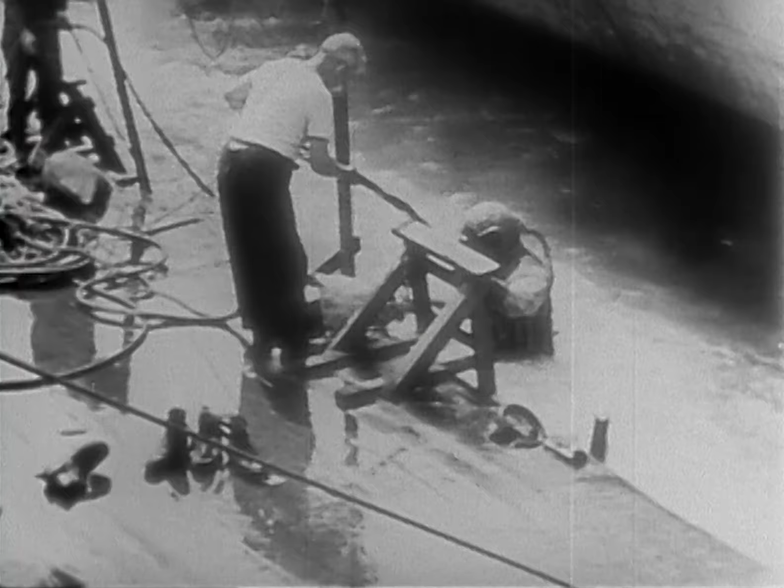A second attempt was made to stop the leak by pouring 100 cubic yards of concrete on the tank top. The concrete pump was used to pump the concrete into place, and pouring was accomplished by the tremie process. The area indicated is the first pour in compartment 16.

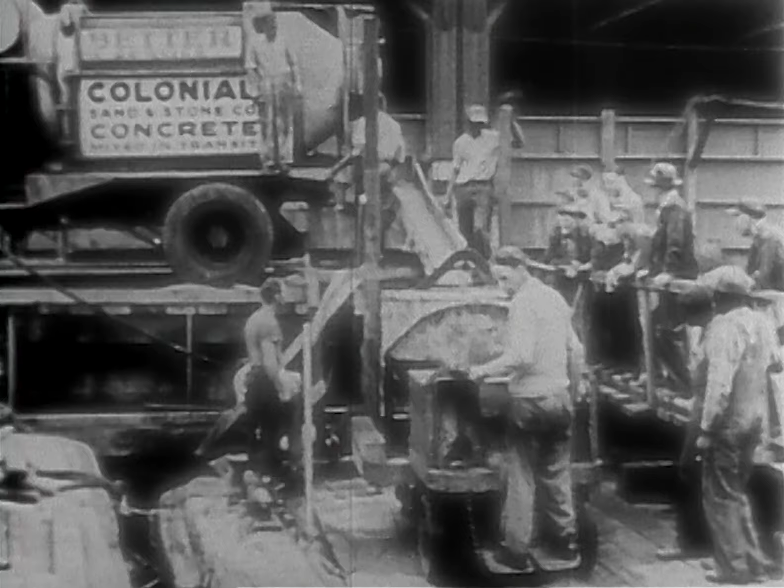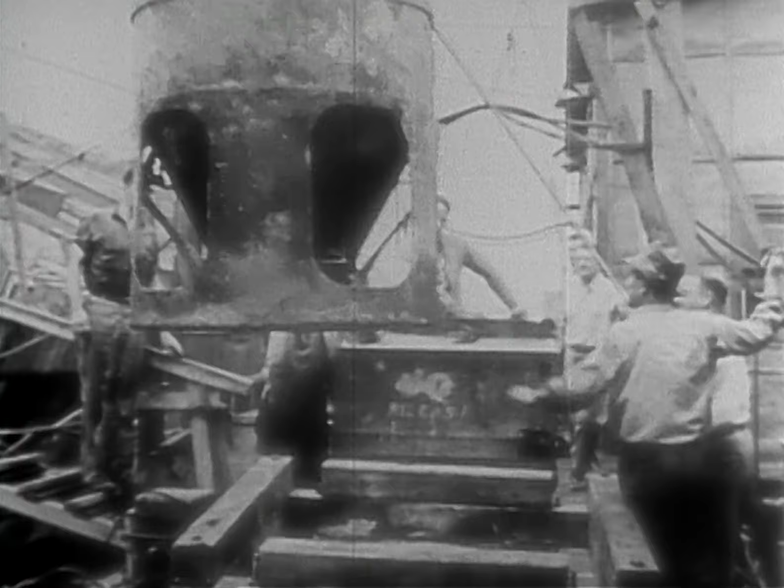At first, this method seemed successful, but suddenly the water commenced to rise rapidly with all pumps going. Subsequent inspection by divers indicated that a rupture in the tanks had opened, abaft the concrete dam which had been previously laid. Following considerable study and search between the 22nd and 30th of August, it was decided to again attempt to stop the leak by filling all the double bottom and wing tanks in the way of any of the ruptures with 800 tons of concrete.

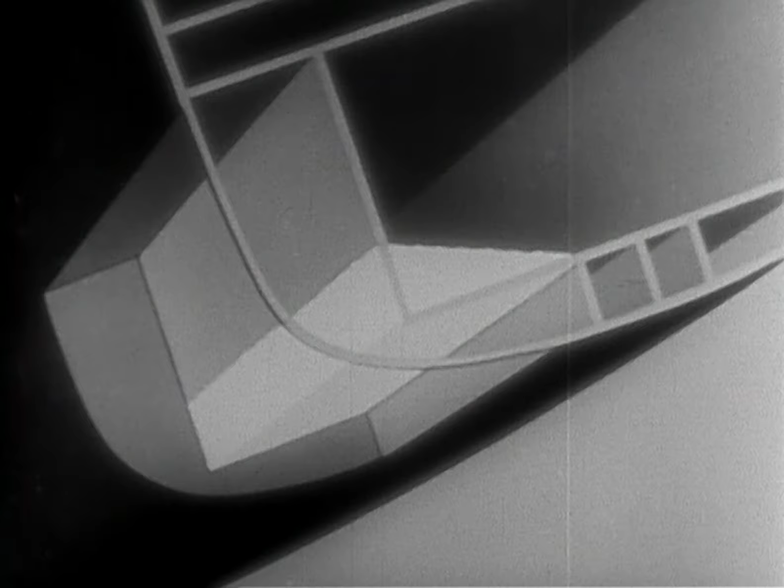In the meantime, by further pumping in compartment 16 and adjacent compartments and ballasting of the starboard side, the list was reduced to 25 degrees. The greater surface covered by the second pour was in the double bottom and wing tanks.

Pumping was again started, raising the ship by parallel rise. And on the morning of the 15th of September, the Lafayette floated clear at both high and low tides. The old water lines left by surface oil could clearly be seen. Divers could now reach the damaged area from the outside, and several thousand bags of rags were stuffed into the cracks.

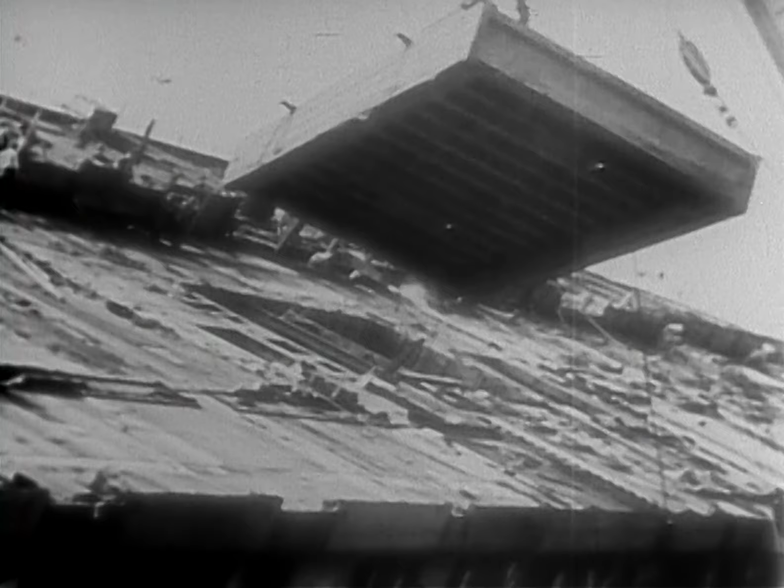From the 16th of September, work was directed toward removing the tremendous amount of timber and concrete construction from the port side of the ship. All port side patches were removed, the removal being a much easier task than the placement. To reduce the list, the starboard wing tanks and double bottom tanks were ballasted with fresh water, and further work continued, removing the remaining water and the large quantities of mud and debris.

A collision mat was placed over the damaged area to secure the leak, in order that the Lafayette could be taken to a dry dock. This mat was one of the largest ever constructed, being approximately 65 feet square, made by sewing standard Navy collision mats together. It was placed and secured by hogging lines attached to the bottom and the top of the mat.

Along with the final cleaning operations and the removal of salvage gear, work was begun preparing the ship for transfer from Pier 88, the slip where she'd lain so long, to the dry dock. Towing eyes were welded along the side of the ship to handle lines from the tugs, and all towing and securing lines were stowed aboard. On November 3rd, the USS Lafayette was transferred from the control of the supervisor of salvage and placed under the cognizance of the commandant of the 3rd Naval District.

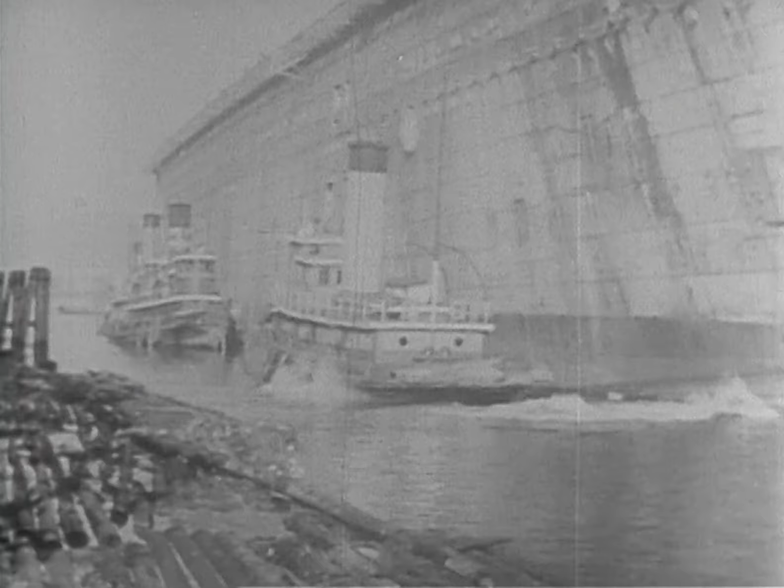On the morning of November 3rd, Captain Manseau and Captain Tooker congratulated each other on a job well done. Behind them, busy tugs bustled in alongside the Lafayette and made fast to her huge fire-scarred, oil-streaked bulk. At 1000, she was scheduled to move from the pier, and at exactly 1000, the great ship began to slide out into the Hudson River.

20 months and 24 days after the first flames had roared from those bales of life preservers, the Lafayette was again underway. On the whole, the entire salvage operation, from the initial development of the plan through the preparation to the final floating and cleaning of the ship, was considered extremely successful. Successful completion of the salvage, at an estimated cost of $4,500,000, is complete justification of the committee's recommendation of salvage, in that a hull greatly exceeding the salvage cost was recovered, and by removal of the ship, two 1,000-foot piers were again made available for use.

Three tugs were bridled at the bow, two tugs worked at the stern, while 15 others crowded along her hull as she slowly moved down the river in the bright November sunshine. When one considers the hazards that attended the salvage work, it is amazing and of credit to the United States Navy that not one single casualty occurred, and comparatively few accidents, despite the fact that the daily average of men employed on the project was 700.